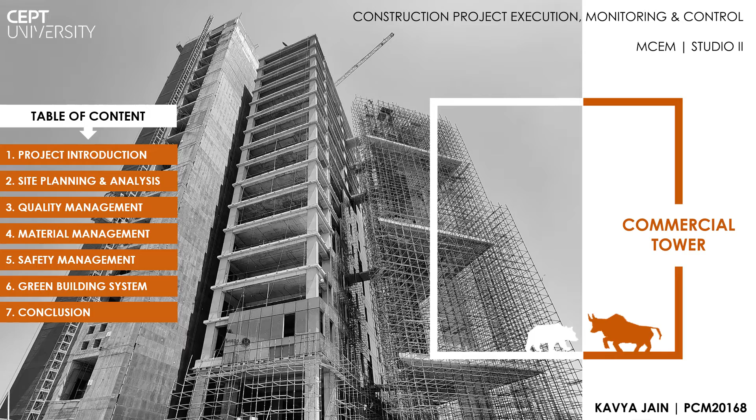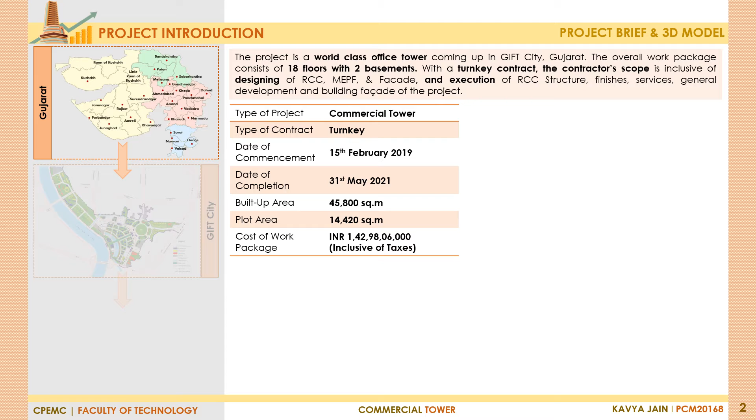The project is a world-class office tower located in the state of Gujarat. It is coming up in the GIFT City development. It consists of 18 floors with 2 basements. With a turnkey contract, the cost of the work package being studied is around 142 crores, including preliminaries, cost of construction, consultancy fees, and taxes.

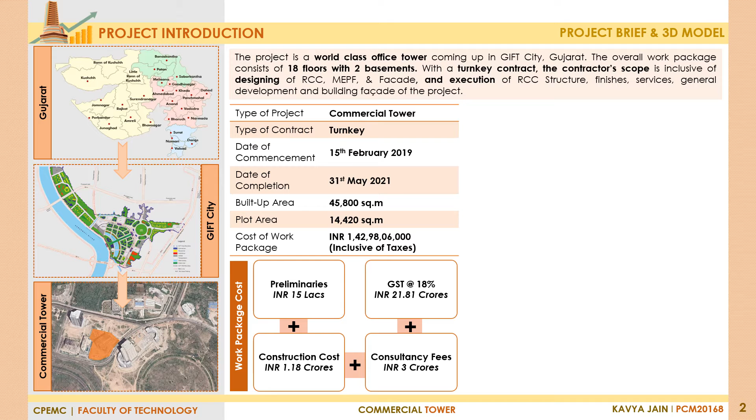The first exercise is the study of the site layout planning. The site plan indicates the upcoming commercial tower, the 2 basements, and centrally located tower crane. There are 3 entrances for the site.

Entrance 1 is the primary entry point. Entrance 2 is for labor entry. And entrance 3 is a temporary gate provided for concreting.

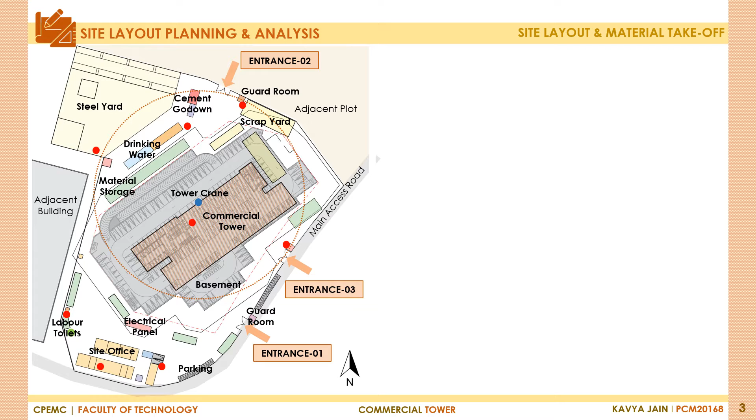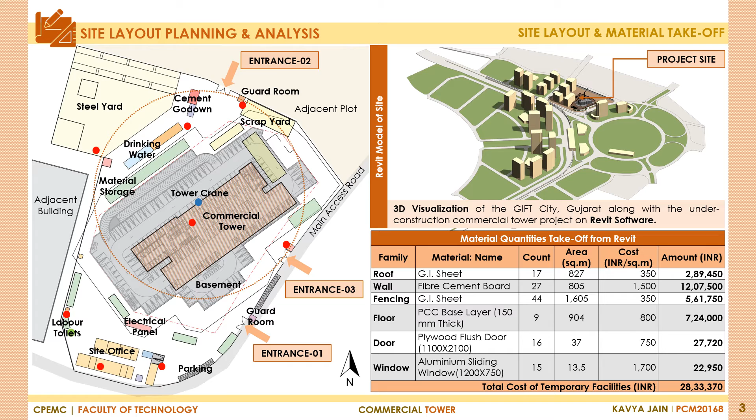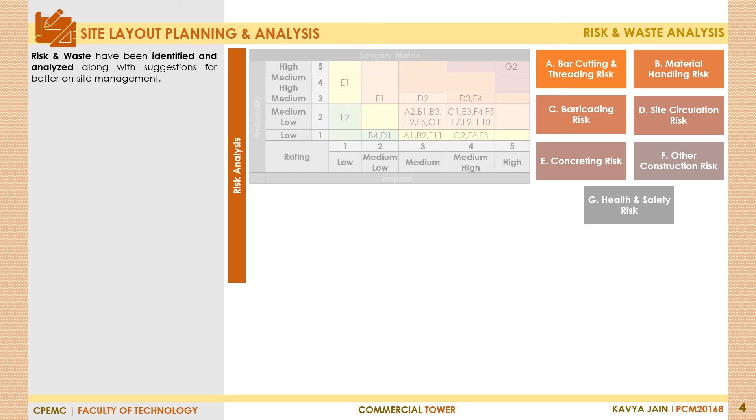Risk and waste have been identified on site. 28 risks in 7 categories were listed in the pre-construction and construction phases. A severity matrix was prepared for the same, indicating maximum risks to be in other construction risk category with medium to medium-high severity.

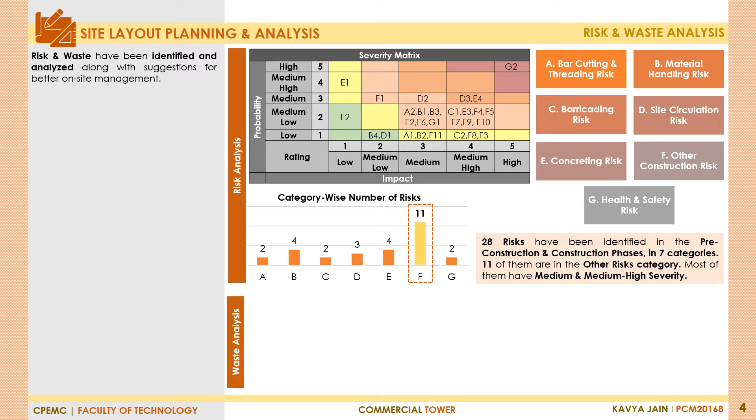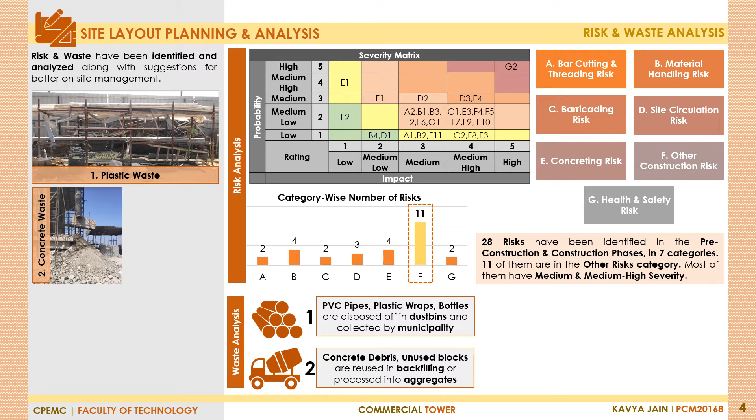4 types of wastes have been identified on site. First is plastic waste, which includes pipes, bottles, and is disposed of in dustbins. Second is concrete debris and blocks, which is reused in backfilling.

Steel waste includes reinforcement and wires recycled by selling as usable scrap. The last is miscellaneous waste such as helmets, jackets, which are sold to recyclers.

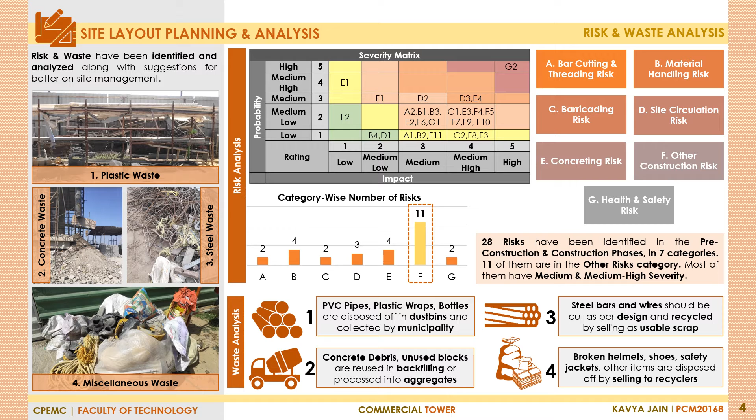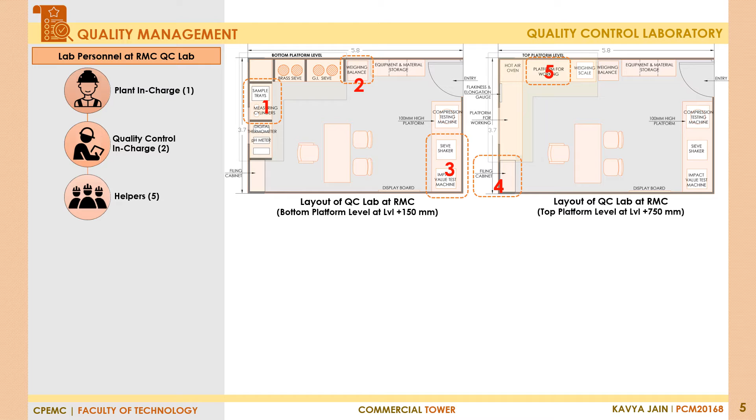Quality management is eminent in any construction project. The layout of the quality lab at RMC plant is shown in 2 levels, lower and upper platform level. The lab personnel consists of plant in charge, 2 heads for quality control, and 5 helpers.

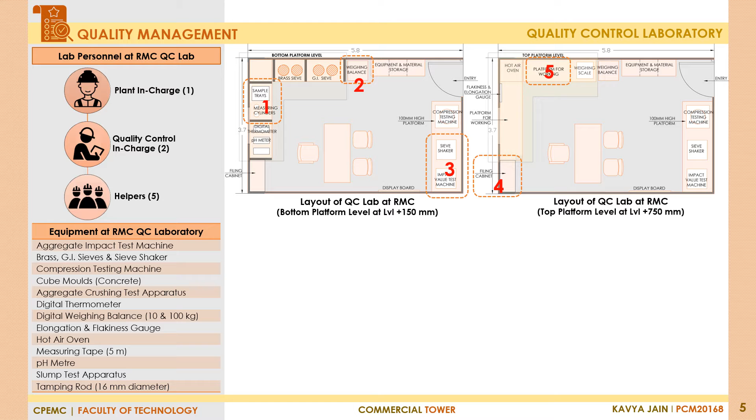A list of the equipment at the lab along with the specifications, calibration, make was also studied. The lab consists of compression testing machine, sieve shaker, hot air oven, and other equipment. A curing pond is located close to the lab along with cube casting area.

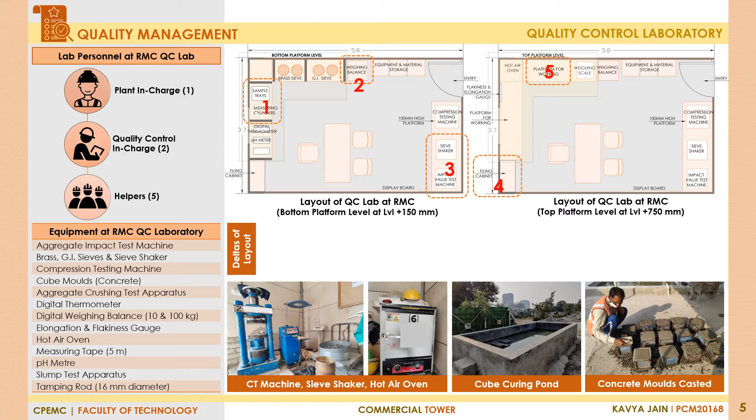A few suggestions were made for improving the lab layout, which included increasing lab area, more organized equipment, addition of a filing cabinet, and clearance of working platform.

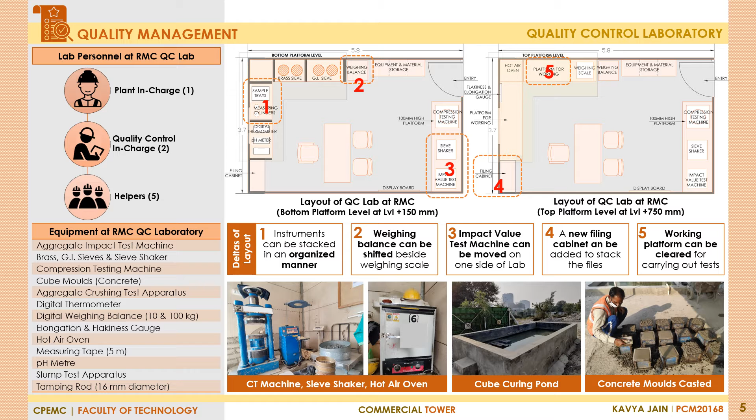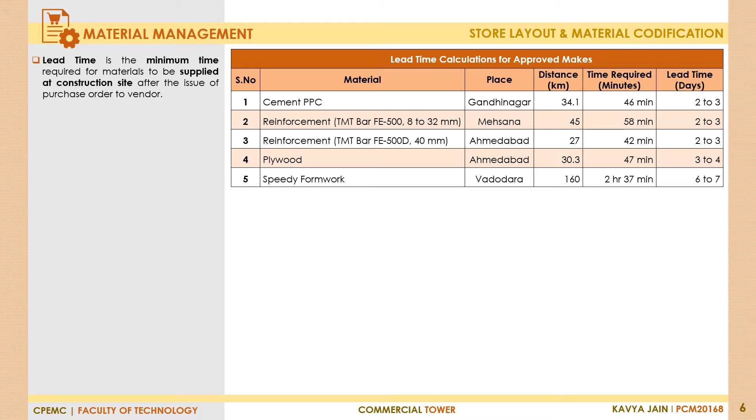The next activity studied is material management. Lead time analysis of 5 construction materials helped understand the minimum time required for materials to be supplied according to approved makes. A layout of the material store was prepared, which comprises of 3 storage racks, filing cabinet, and other construction materials. The materials stored in the first, second, and third racks are also listed.

Further, materials at site were classified and provided a codification according to their categories, mainly divided into construction materials, consumables, and semi-finished products.

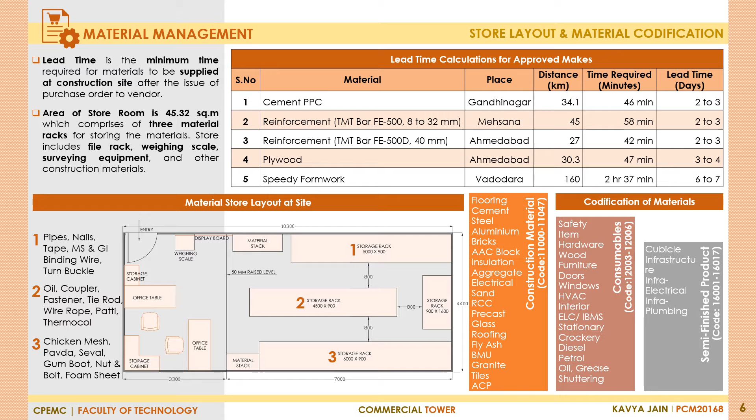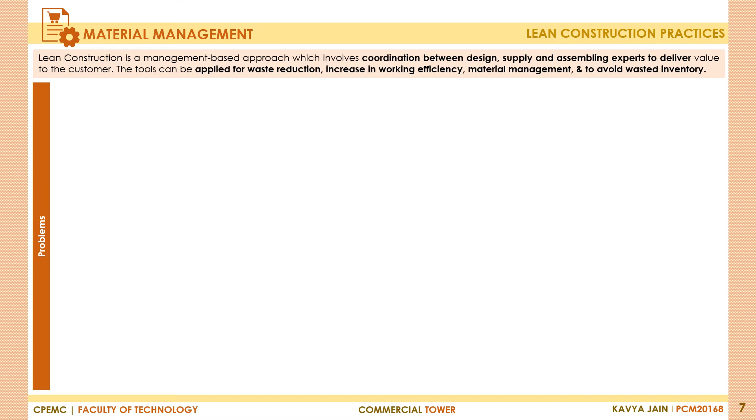Lean construction involves application of lean tools for waste reduction, improved productivity, and material management. Firstly, the various problems in material management are listed on site, including obstruction of pathway in material store, mixing of different categories of material, and mismatched labels. Lean tools are thereby applied to formulate solutions for these problems.

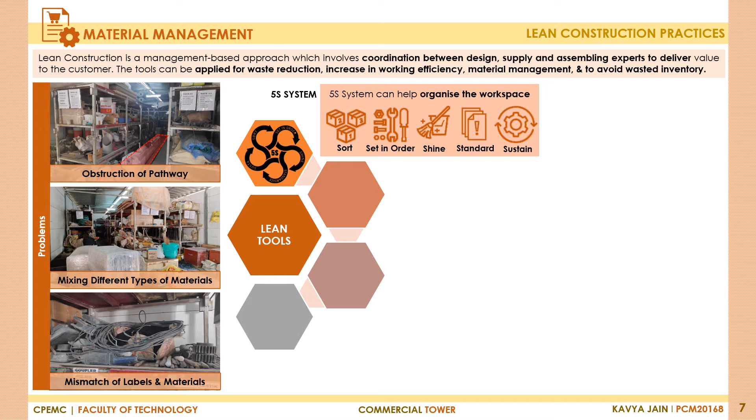5S helps in organizing the workspace. Kanban prevents shortage of material. Just-in-time enables savings in costs of dead inventory. Kaizen encourages continuous improvement on site for systematic storage.

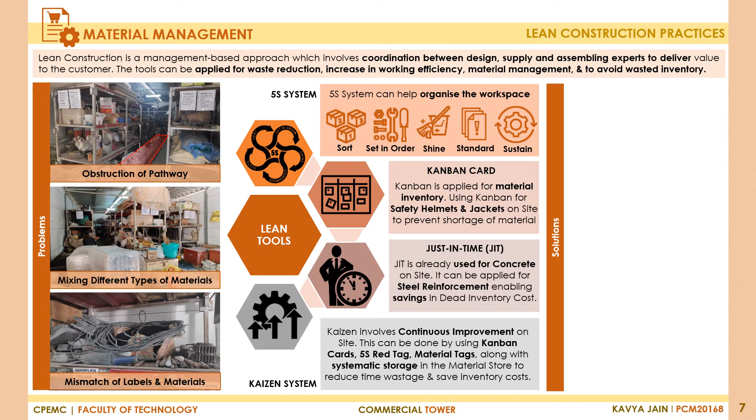Applying these lean tools, solutions suggested are Kanban card for inventory management, material tagging for easy identification, and 5S red tag for visual management.

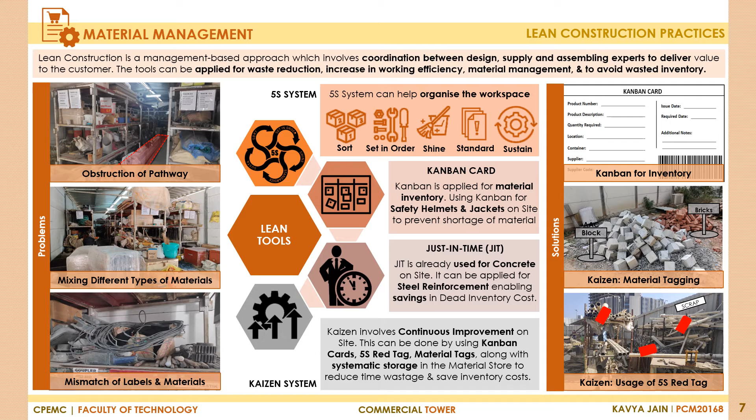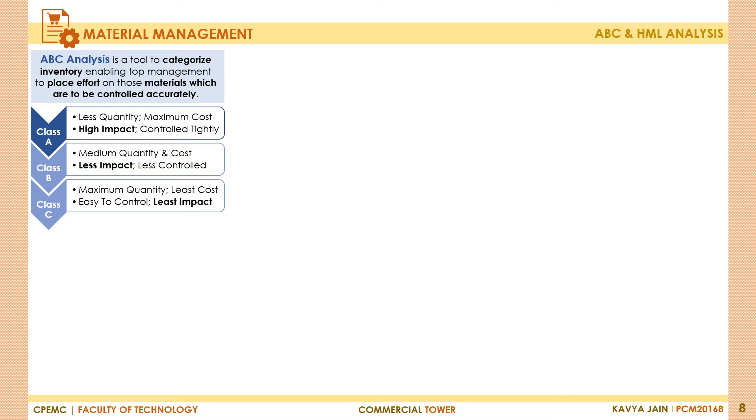ABC analysis was done for 10 materials identified in the project to categorize them into class A, B, and C on the basis of their quantity, cost, impact, and required controllability. Reinforcement is identified as class A material, while stone, tile, binding wires, and AAC blocks fall in class B, and oil, cement, nails, and sand are in class C, and therefore have the least cost and impact out of these 10 materials.

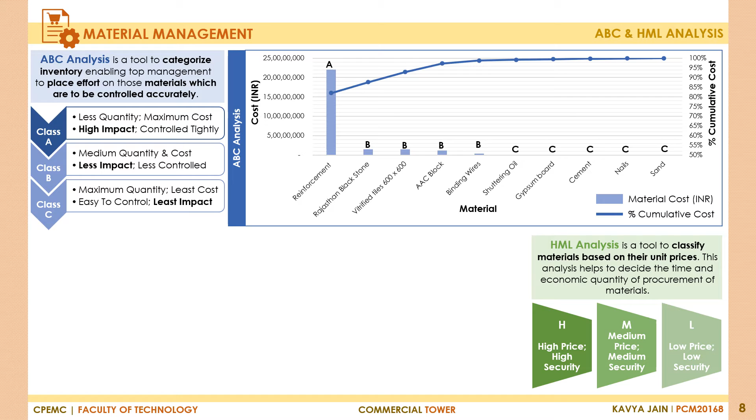In HML analysis, materials are categorized into high, medium, and low class on the basis of unit price. Shuttering oil is in the high class and requires highest security. Binding wires, reinforcement, and nails are in medium class, while cement, AAC block, and sand are in low class, therefore requiring least security.

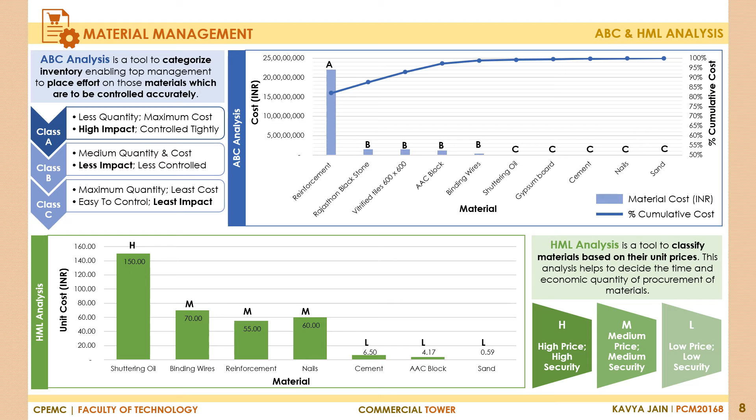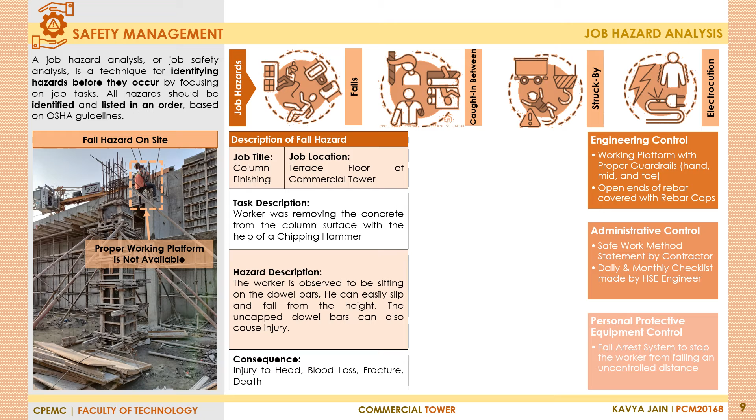3 types of hazard controls have been suggested for prevention. Firstly, engineering controls, which include provision of a proper working platform and covering bar ends with rebar caps. Administrative control includes abidance to safety standards and checklists. Lastly, personal protective equipment control suggests usage of a fall arrest system to prevent falling an uncontrollable distance.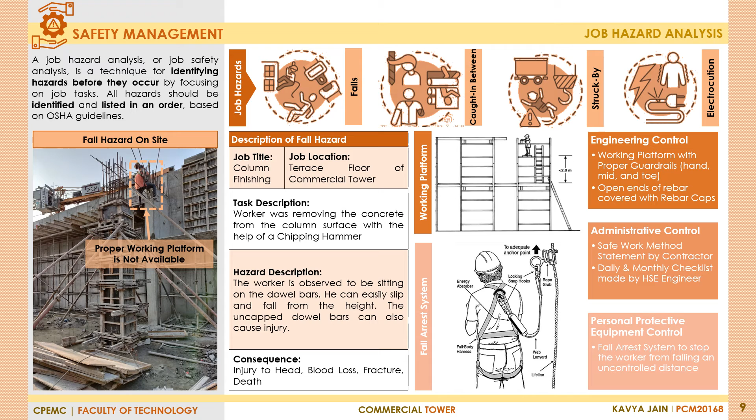Green buildings are no longer an exception but have become a norm in the construction industry. The project incorporates several green practices such as provision of green terraces and 75% daylighting in office areas.

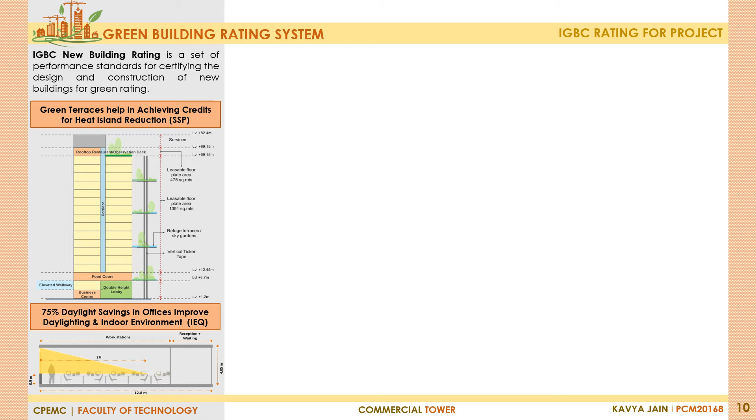These practices make it likely to achieve 60 points and doubtful for 15 points on the IGBC Green New Building Rating Scale. With a total score between 60 to 74, the project can easily achieve IGBC Gold rating.

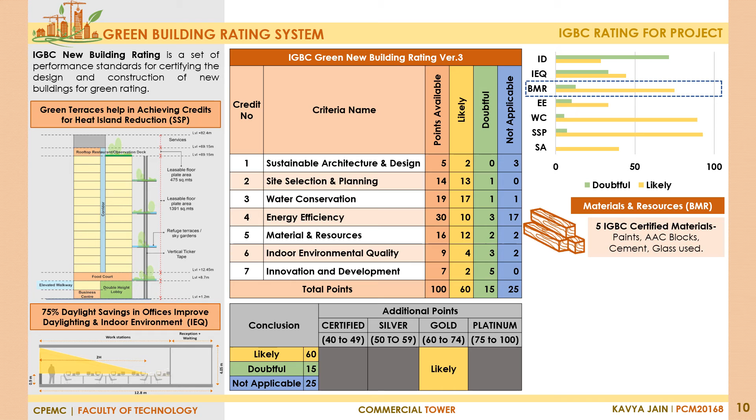The project scores the highest in the following 3 categories. Firstly, usage of 5 IGBC certified materials helps it score high in materials and resources category. Wastewater treatment, rainwater harvesting, and efficient landscape practices enable a high score in water conservation category. Proper planning in initial stages of site selection and basic amenities help the project score well in the site selection and planning category.

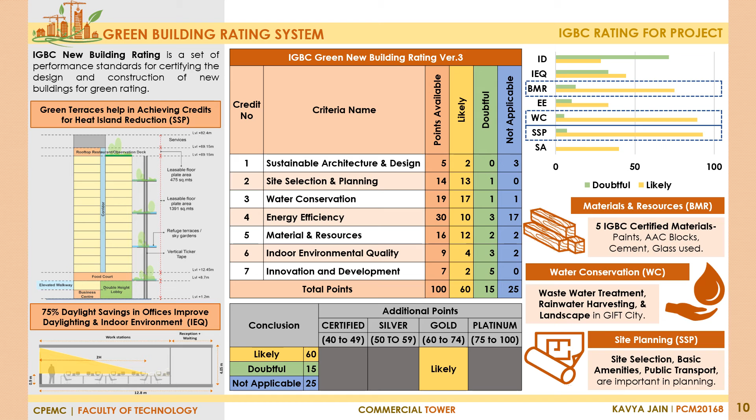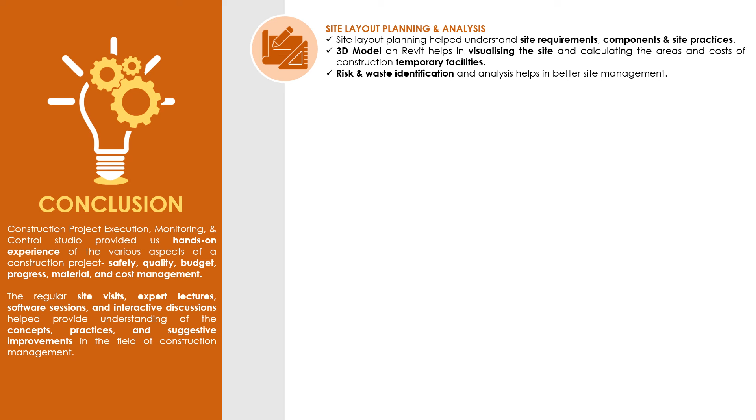In conclusion, the construction project execution, monitoring, and control studio provided us hands-on experience of the various aspects of a construction project with the aid of regular site visits, expert lectures, software sessions, and interactive discussions. The key learnings from the various deliverables are as follows. Site layout planning and analysis helped understand site requirements, components, site visualization, risk and waste identification, and analysis.

Quality control is imminent to ensure quality output and abidance to proper standards. The QC lab layout shows the lists of equipment, lab personnel, and areas of improvement for the lab layout.

Material management is important for organizing and planning site materials. ABC and HML analysis helps in material classification. Lean tools like 5S, Kanban, Kaizen, and JIT help in improving on-site material management.

Job hazard analysis identified the various types of hazards prevalent on a construction site. It helped understand the hazard controls required as per OSHA standards to avoid or mitigate the occurrence of a hazard.

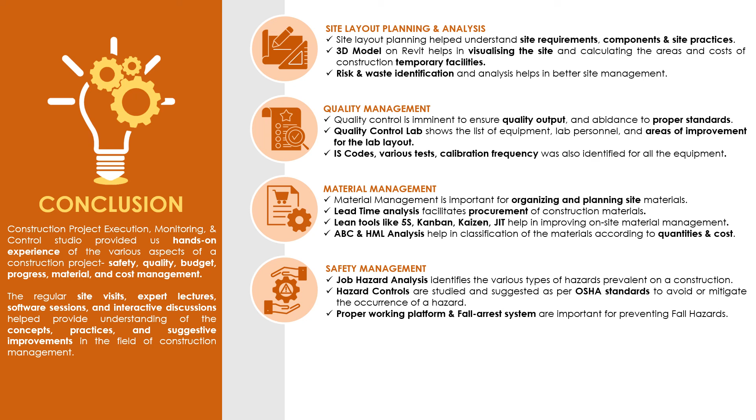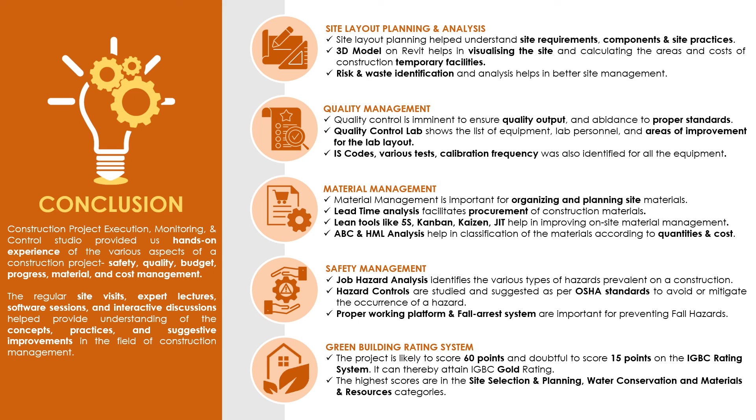In the Green Building Rating System, the project is likely to attain IGBC Gold rating. The highest scores are in the site selection and planning, water conservation, and material and resources categories. Thank you.